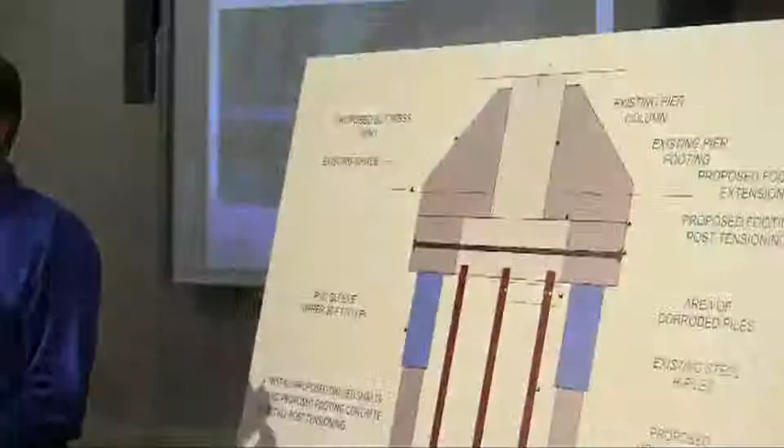Okay, thank you, Kim. I'd like to take a couple of minutes to talk conceptually about what we're doing here to fix this. He's getting a display ready that we'll talk off mostly in the elevation view, but as mentioned, as you can see behind me, piers 21 through 25, this repair will be done on all 5 of those piers similarly, and then we'll be doing some additional work at Pier 22 to jack the bridge back into its position.

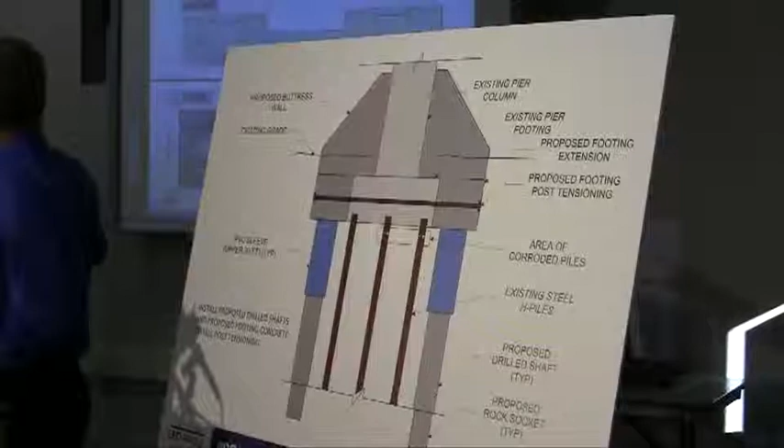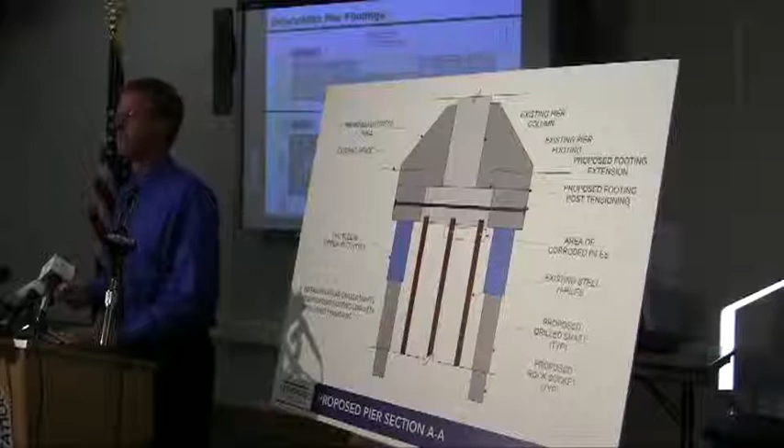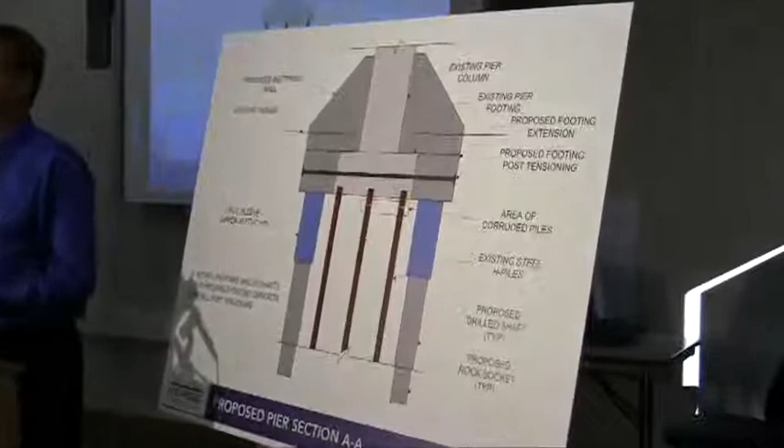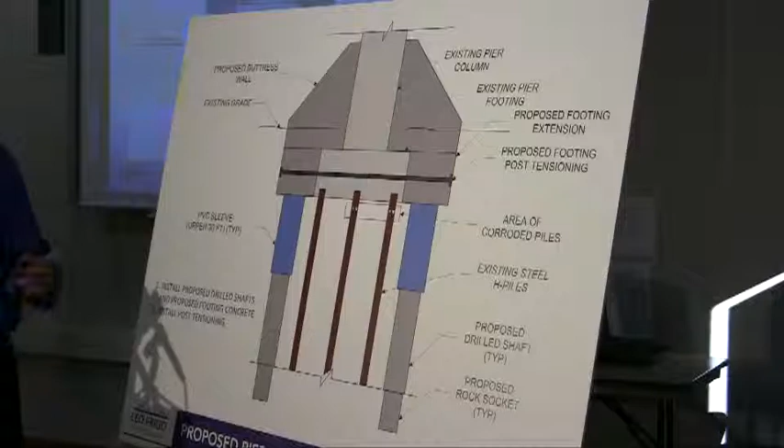As you'll notice, in that 120 feet, about 30 feet down, we've got this blue PVC. That's to protect the shaft from any potential corrosion. We'll also have high-density concrete, as well as epoxy-coated bars to protect anything that we have in that shaft. Now, if you look up above where the existing footing is, you'll see the encapsulated footing here. What we're doing there is putting post-tensioning bars, drilling through the bottom of the footing as well as through our new footing, and we're going to post-tension, or squeeze that together, to transfer all the loads coming down from the bridge into our new shafts.

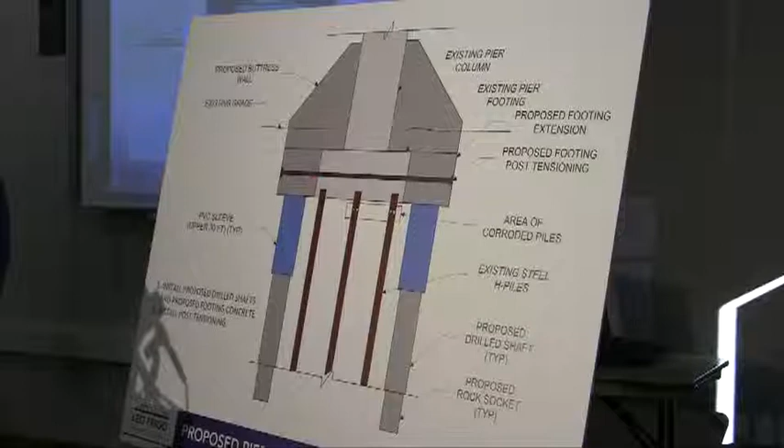And the goal is then to not have to rely on these piles. We're also putting up here what's called a buttress, basically doweling that into the columns and into the footings to tie that load transfer into our shafts. And this repair will be done, as I mentioned previously, on all 5 of the piers.

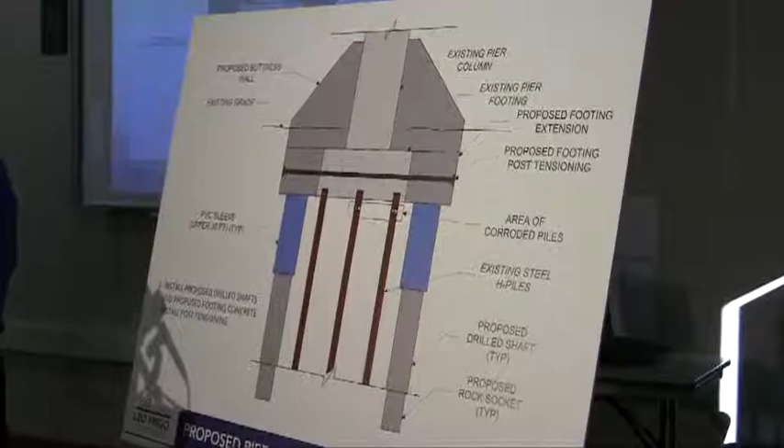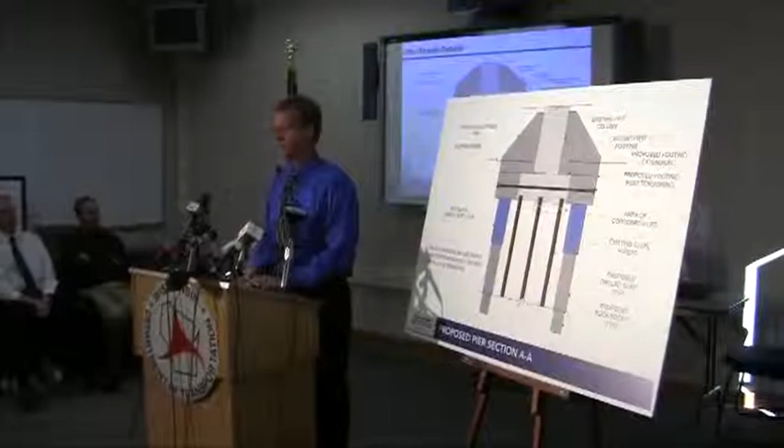On Pier 22, once we have the strength in this system, we will move to the top of the pier and we will jack the pier, the superstructure and deck back up to its original location, approximately 2 feet. We'll then pour concrete and steel in there to encapsulate that area in the pier, and then the structure will be put in position.

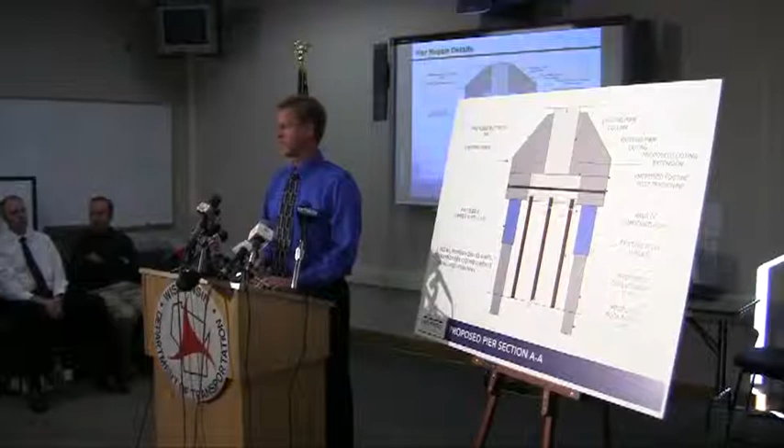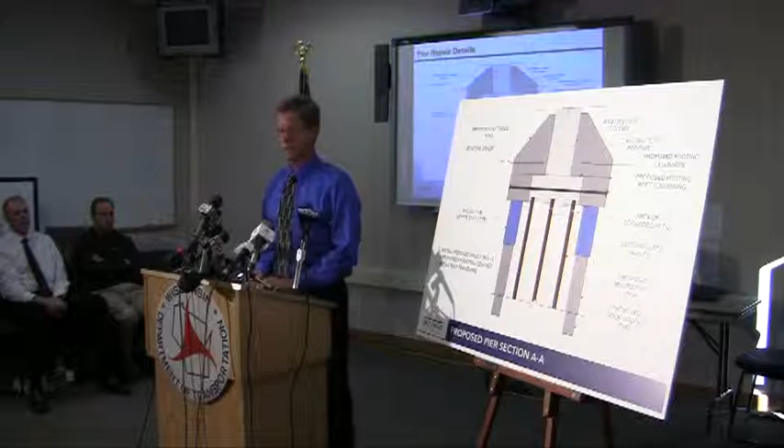Prior to opening to traffic, we will go up and inspect the deck and the riding surface to make sure it's safe and serviceable, and then we'll be ready to open up to traffic. So that will get traffic open, but we will be doing some potential preventative maintenance and service life type of work around some additional piers, or these piers, over the spring and summertime. But traffic will be in, and these are not structural repairs that we'll be looking at. So I think with that, I've hopefully described what we're doing for the fix.

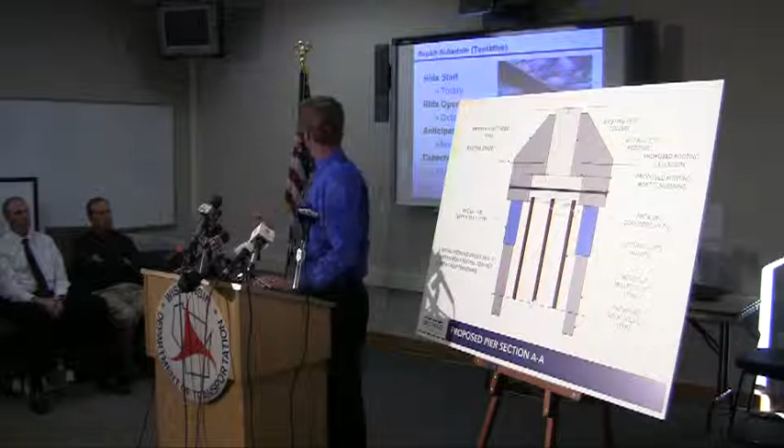Actually, I think we have another slide here to talk a little bit more about the schedule. I know the Secretary talked about the schedule, but as we said, the bids are going out today. We will be opening the bids next Tuesday, October 29th. And from that, we're anticipating a start date of November 4th. And as mentioned, January 17th is the date that we hope to have this bridge open up for service. So with that, I think we'll open it back to you.

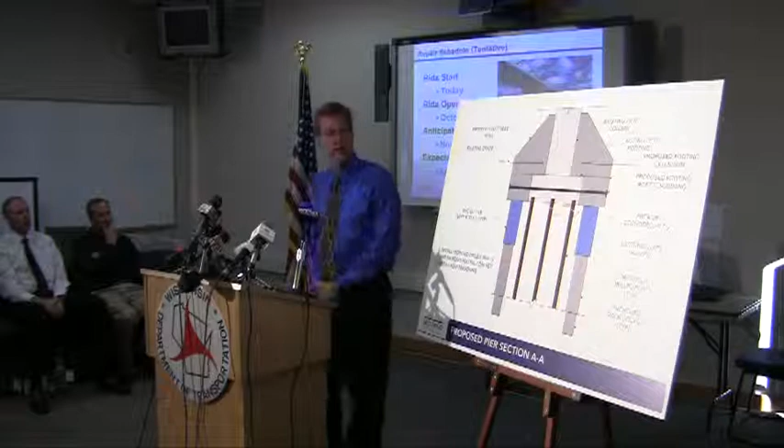We'll have that display available for you. Just want to wrap up a couple of things here before we go to the Q&A. First of all, the PowerPoint will be available to all of you. Just give us your email address, we'll send it to you. We are going to be available for interviews after the news conference. The Secretary will stay, Scott will stay, I will stay. We're also going to have one of our traffic engineers here if you have some questions about traffic.

As for updates, again, we're going to keep doing what we're doing. We'll keep giving you updates as needed. Certainly, as things change out there, we'll be sending out video to the media. And then after today, as things change and we do get an availability out there, we will be bringing media on site for media tours. It's not going to be every couple of days, but it might be at least every couple of weeks we can get you out there. The one thing we can't do is interfere with the work going on out there, and there's not a lot of room. So keep everybody safe, but we will try to get you back there if we can.

This afternoon, we're going to meet at the same location on Quincy Street. Bring your safety gear. If you don't have it, please see Mark, and we'll provide it to you. The briefing's at 1 o'clock sharp, so get there a little early if you need safety gear. Dress warm. Last time we took you to Pier 13. Today we're going to take you much closer. We're going to get you out to Pier 18. And as we explained, we're going to show you some of the stabilization work that's going on, and you're going to get that much closer to Pier 22.